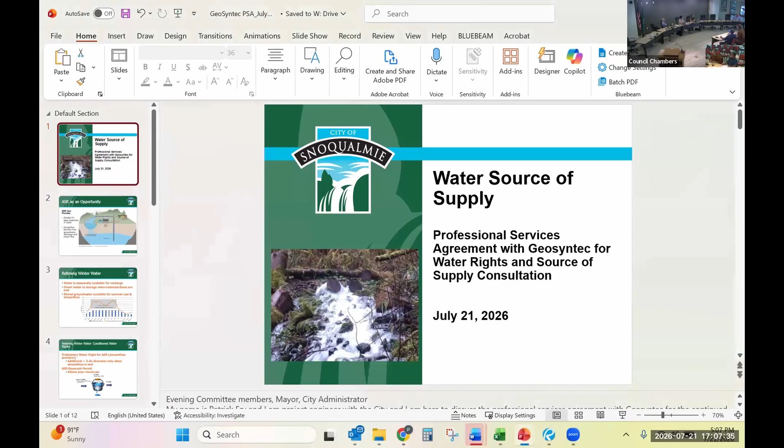There we go. Evening, committee members and mayor. Patrick Fry, project engineer at the city of Snoqualmie. So as mentioned, this agenda bill is for a professional services agreement with Geosyntec.

And this is with regards to ASR. So this is hopefully the final contract in a long list of contracts concerning ASR. So that's the broader project is considered ASR. So before I touch on what's in this contract specifically, I wanted to back up and give an overview of what this project really is and what ASR is.

So ASR, it stands for Aquifer Storage and Recovery. And it's essentially using a natural aquifer as a reservoir. So if you imagine all of the water towers that you see everywhere you drive, instead of a water tower, it's using the aquifer as one of those water towers.

In our specific instance, what we're proposing is taking water from Canyon Springs, which is one of our main water sources, and conveying it to the south well field and then putting it down into our aquifer that we're already utilizing. So what this methodology really does is it uses existing infrastructure and an existing aquifer as a new facility, essentially, and saves a lot of money.

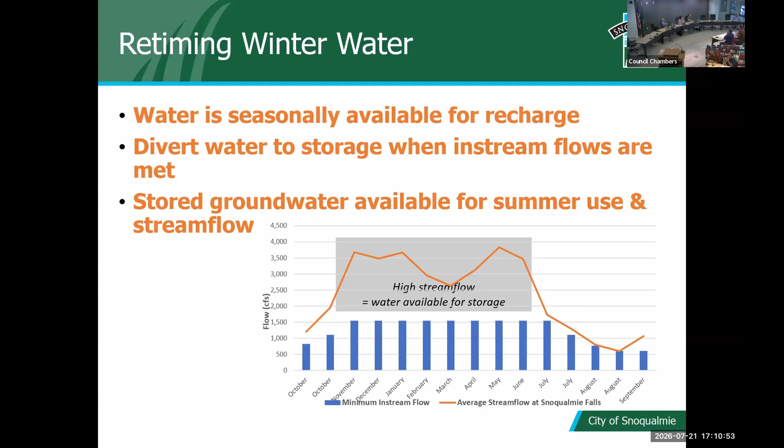Unfortunately, that is also when the city is demanding the most of its water. So by getting an additional water right from Canyon Springs and putting it into the ground, we can be taking water from Canyon Springs in the winter when water is plentiful and there's no in-stream flow rules in effect, put it into the ground, and then pull that water out during the summer when in-stream flow rules are in effect.

From a regulatory standpoint, what that means is there are two water right applications. One is for the water right from Canyon Springs itself, subject to in-stream flow rules — that's additional water right on top of our already existing water right there. The second application is for a reservoir permit treating the aquifer as a reservoir, which would allow us to pull the water out at any point during the year without being subject to in-stream flow rules.

So that's ASR in five minutes. Before I move on and get to the contract, are there any questions with regards to how that works on a general scheme? No, I think I'm pretty good with that.

I was noticing the timeline that we've already invested a lot of time in actually collecting some data already on that, and also have we received the grants? Yeah, okay. I'll touch on the timeline of everything and the grants in a few slides.

I just want to make sure everybody has a general idea of ASR. Question? We're moving on. Question.

So an additional 3 cubic feet per second diversion, only when in-stream flow is met, meaning during the wet season, we can take out an additional 3 cubic feet per second. Opposite in winter, we can take out additional cubic feet from Canyon Springs at times, and that's the water that'll go into the aquifer storage.

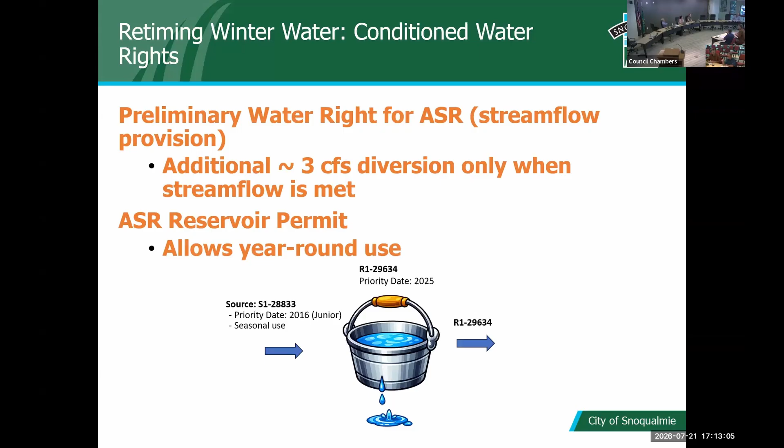Okay, good to move on? I guess there's one thing we should mention too, is that there's another side benefit to ASR, in that every year we'll pump up the aquifer with this water, which helps maintain flows in the river downstream. That's why we were given a $500,000 grant, a stream flow restoration grant, because the benefit of doing it is felt downriver, and it offsets a lot of what's called exempt wells, people who live outside a jurisdictional water system who have a right to drill their own well for their own use. They don't have a water right, they have a permit to drill water, but there's a lot of those out there, and these ASR projects help to offset as well.

Are some within the city, or is it just unincorporated areas? All of those exempt wells are outside the city limit, because if they were in the city limits, they would be on our water system. Okay, thanks.

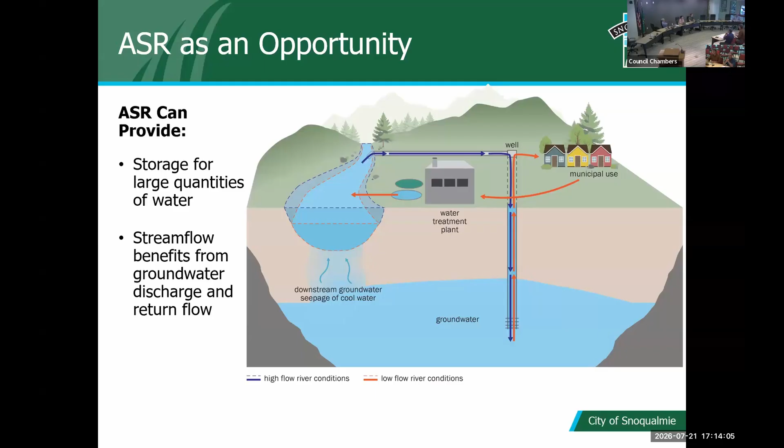All right, so moving on and focusing on what's actually in this contract. The goal of this contract is really to complete the ASR project as a whole, so hopefully this is the last contract you'll see with regards to that. But specifically, it's completing the remaining pilot study. So we completed a pilot study.

We ran a pilot study this spring, essentially a mini ASR proposal, and we were collecting data that whole time. Now we have to have our consultants read that data and create a report that goes to ecology for that pilot study. It's completing the reservoir permit application, providing water rights support, which is mainly helping us deal with ecology and what their needs and wants are, and then engineering and water supply support. So on the whole, that's what's in this contract.

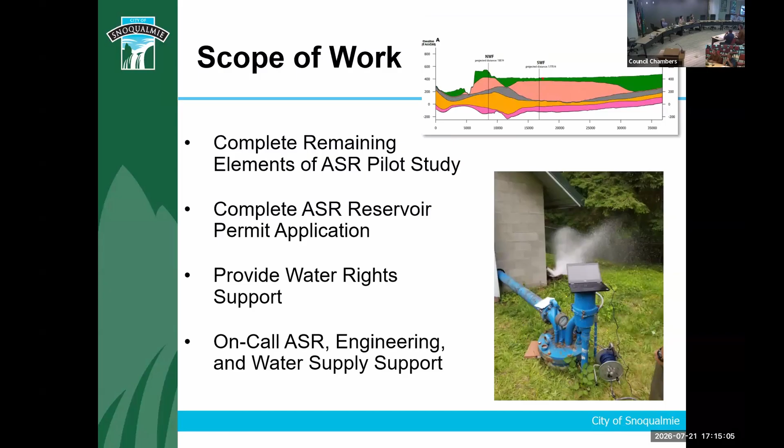The few milestones I want to touch on: ASR was identified at the end of 2019. So that first contract was really, hey, we have a water problem, what can we do to solve it? And after a couple of years, ASR was identified as that solution. So it's been 7 years since that time, and we're not expecting to be project complete until the end of 2028. So this is nearly a 10-year project, and we're just on that last, hopefully, 2 years of it.

That ecology grant that was mentioned, we received $477K at the end of 2020. And then that grant was increased to $529,000 in early 2023. As Jeff touched on, that was a stream flow restoration grant, and it's exactly that, to help study the benefits of stream flow with ASR. So we have been billing to it, and we haven't received the full $529,000 because it's a reimbursement program, but we have been reimbursed a large portion of that by now.

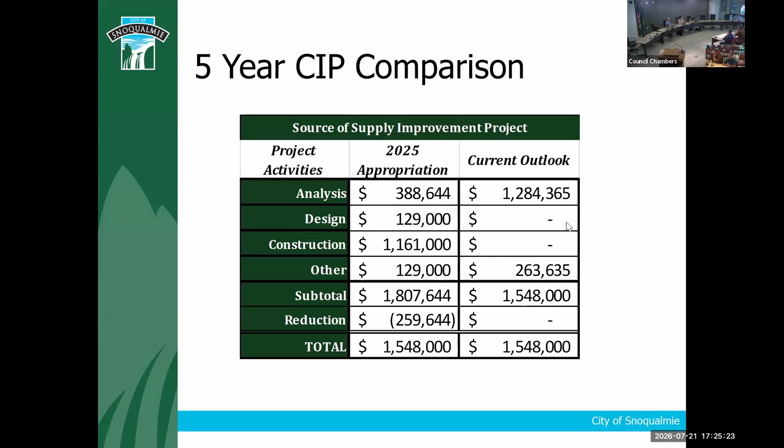394. Okay, sorry. And that'll bring the overall project expenditure to date, with that 394, up to 1.548 million, projected. Not including labor? It does include labor, I wanted to make sure that was clear. The 1.548 includes labor, so if you tally up all the contract totals, it's not going to be 1.548 because that wouldn't include my labor.

So here's the current outlook of the CIP worksheet, which is probably hard to read from back there, but it shows what all of the previous expenditures were, and my labor.

Do we get that attached to the agenda bill when it goes forward? Yes.

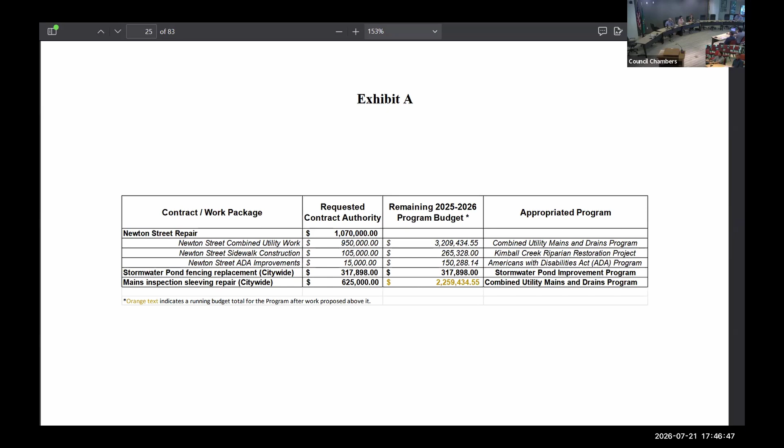All right, so we'll be moving that forward with the updated amount. And then on the regular, not on the consent agenda, who will get to do the Canyon Springs item?

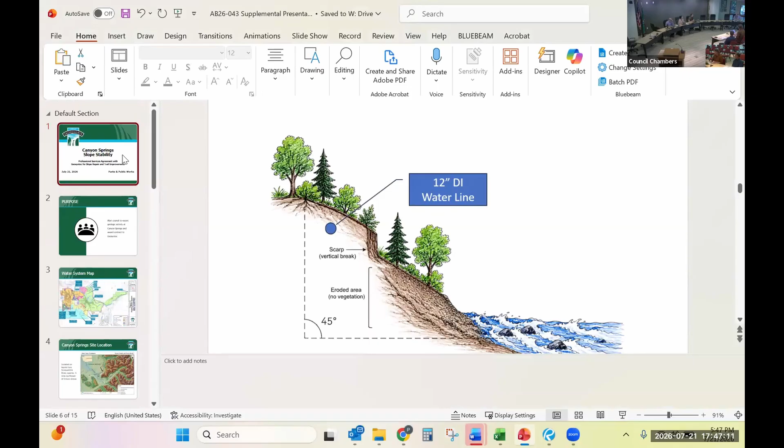So AB 26-043, the Canyon Springs Slope Stabilization Professional Service Agreement. All right, I'm going to pilfer the screen again so I can share a presentation. So again, this one is for Canyon Springs slope stability, but it will give you a little bit of whiplash because it's a professional services agreement with Geosyntec, so it looks similar to 030 for that reason. But this is a totally separate project for Canyon Springs slope stability. So the purpose for tonight is to alert you to recent geological activity that's happened up there, and also to award that contract.

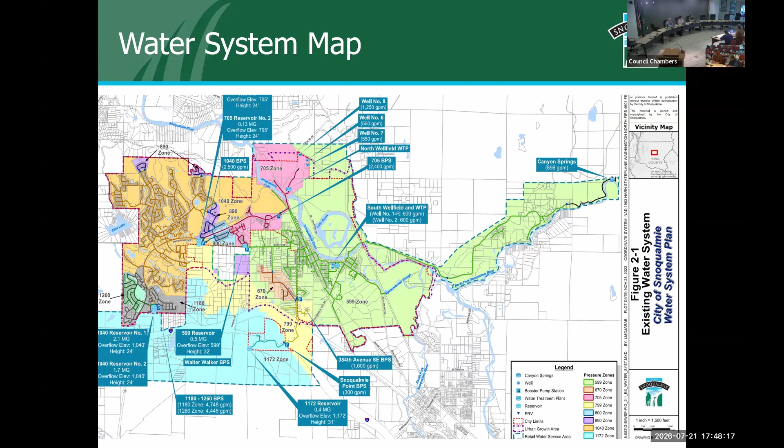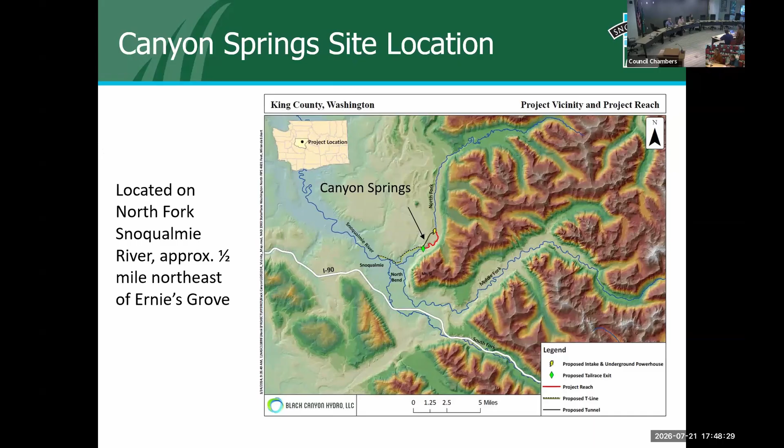I think I've shown you this map before, but just so we're all on the same page, Canyon Springs is way up there on the right side of this map, which is our main water source. It supplies about 900 GPM, 24/7, down to the city - main water source, critical infrastructure. That flows from Canyon Springs through ductile iron pipe and makes its way down to the city. This is its location on a more topographical map, highlighting the area it's in - it's starting to become the mountainous side there.

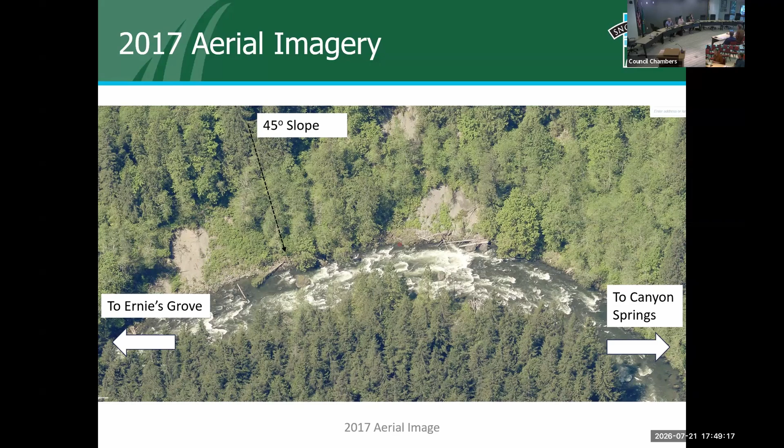Backing up to 2017, this aerial imagery comes to us from 2017. Canyon Springs is to our right in this picture, upstream, call it northeast. Meanwhile, Ernie's Grove is down to the left, downstream of there. What isn't super clear in this picture is that this is a 45-degree slope we're looking at - a really steep hillside. It's not conveyed super well in this aerial imagery because it's 2D, but it is steep. Our water main runs in the ground all along that 45-degree slope.

I did not choose 2017 aerial imagery just for fun. I chose it because in 2017 there was a slide up in that area. You can see right there where it did slide, and that's all the exposed soil. There's no vegetation that slid, and that actually was repaired in 2018. That was a large capital project, pretty neat project actually.

You can also see that there was another slide a little bit upstream, but it was below where our water main is. Again, exposed soil, no vegetation there, but it's a little bit below where that water main is shown. So we put it under a monitoring plan at that time.

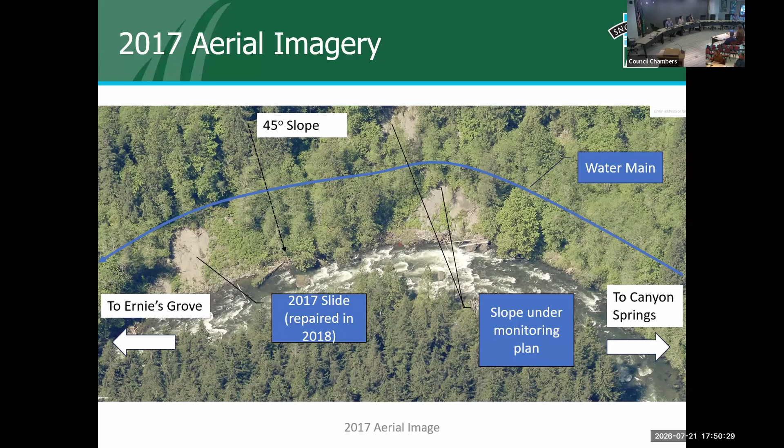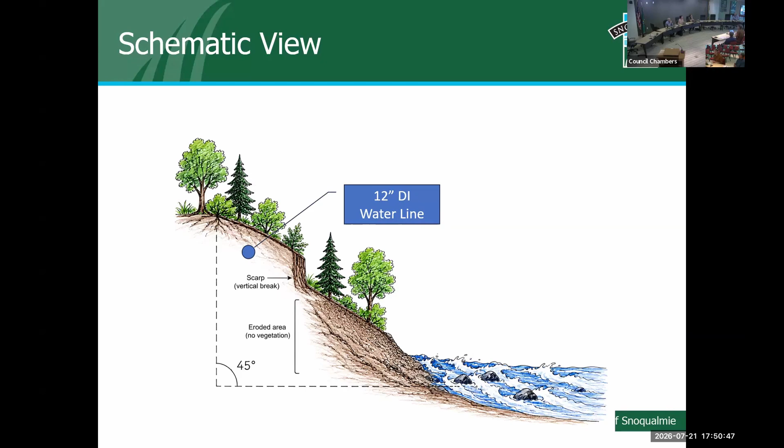Just to give a schematic view of what we're talking about: here's the vertical, or 45-degree slope, the pipe in the ground there, and then what's called an escarpment, or scarp, receding up the hillside towards that ductile iron pipe, which is our main water source there.

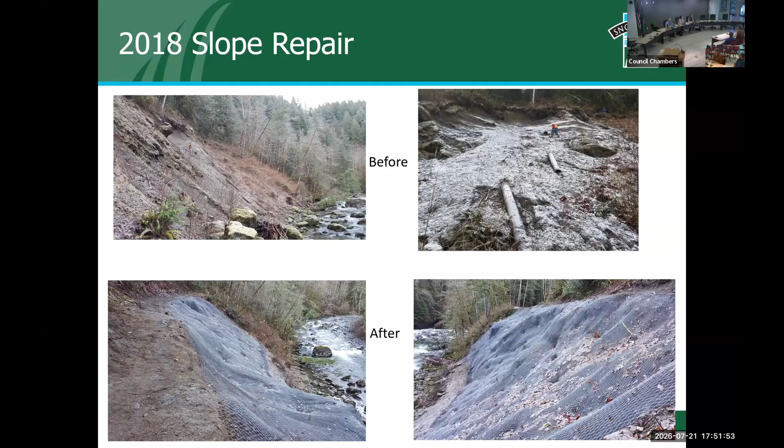Now, remember that other slide we put under a monitoring plan that we've been monitoring since? The quote from Aspect was: although this slide does not threaten the pipeline now, it almost certainly will within a few decades, when the distance to the scarp is about 10 feet. Planning for the slope repair should start. That was Aspect, now Geosyntec, in 2018.

So since then we've been monitoring it. In 2019 the distance to the pipe was 22 feet, so we still had significant difference. It was still 22 feet in 2020, 20 feet in '21, 20 feet in '22—not a whole lot of movement in those three years.

In '23 we had a jump of 3 feet. '24 didn't move at all. '25 it moved a foot. Then in 2026 it jumped 5 feet. If you remember, we had a lot of flooding back in December—that is likely the cause of that recent activity. So now we're right at the point where planning should start for slope repairs on that additional slide. That's where we are today.

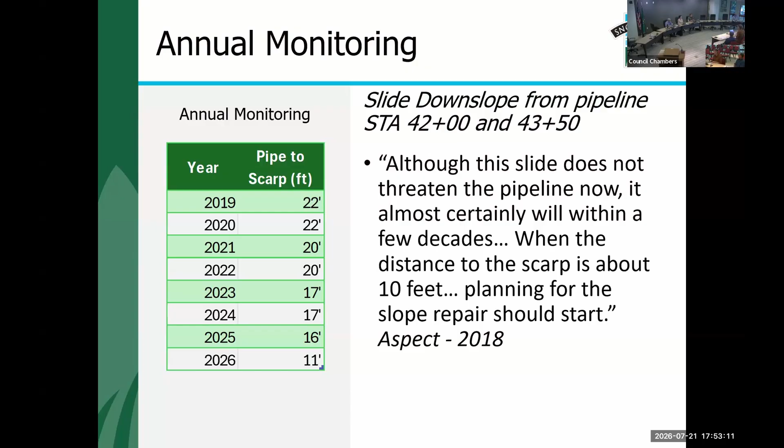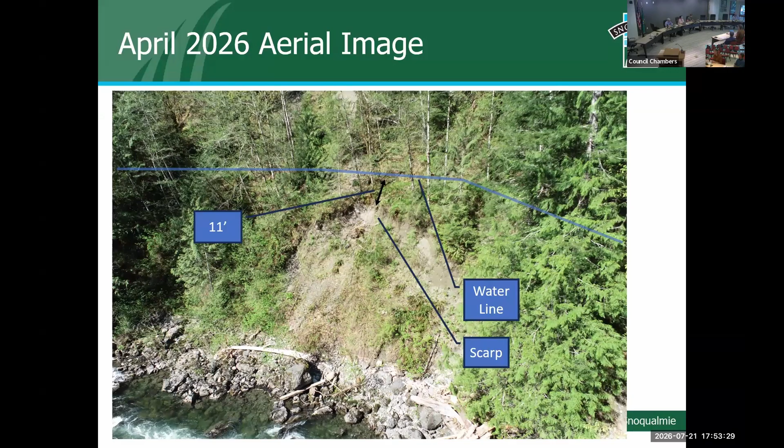Just to give a 2026 image, here it is. You can see the blue highlighted area is about where our water main is, and the scarp is shown with the 11-foot distance there. Those measurements are quite precise because we staked it all out.

Going back to how the escarpment was receding and getting closer to the pipe, when we created the 2025 sheet back in 2024, the projected outlook looked like we wouldn't have to do anything until the early 2030s. But that 5-foot jump from 2025 to 2026 aggressively moved forward the need for this project more than we intended or planned for.

So this contract with Geosyntec is to get the design to 30%, just to get moving fast on this, because the goal is to hopefully do the slope repairs next summer. We'd be working with Geosyntec to get to 30%, and then we might explore design-build options, again to meet aggressive timelines, but also to see if we could get innovative techniques for that. But that's a next contract situation.